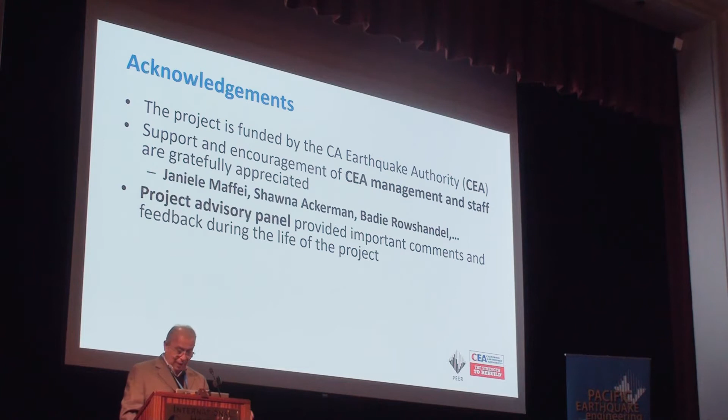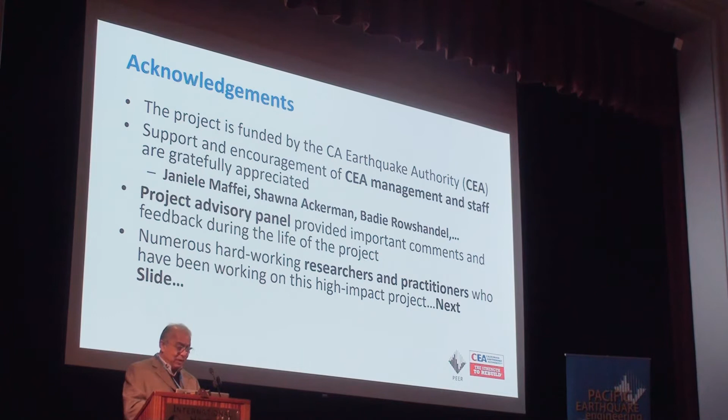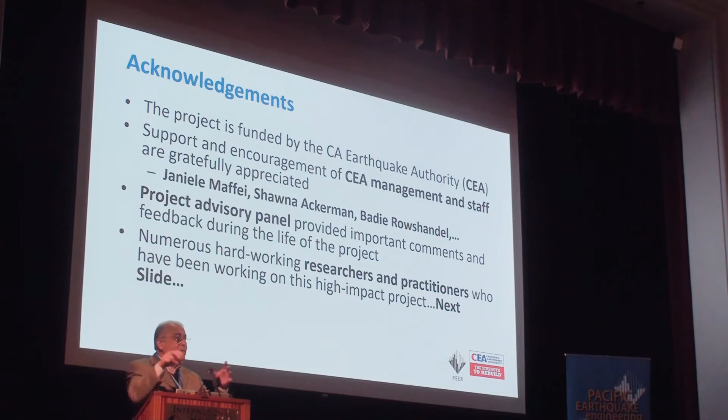Then there are two different review panels that I'm going to elaborate a little bit. One review panel on behalf of CEA, one review panel on behalf of the project, and we benefited from both panels. There are lots of people who work on this project. Numerous people. This is the strength of our community. Large projects, many people involved, students, postdoctoral fellows, researchers, practitioners, and at the end we stitch all the pieces together. It's really like a large puzzle, the pieces of the puzzle should go together at the end. So these are the people who are involved.

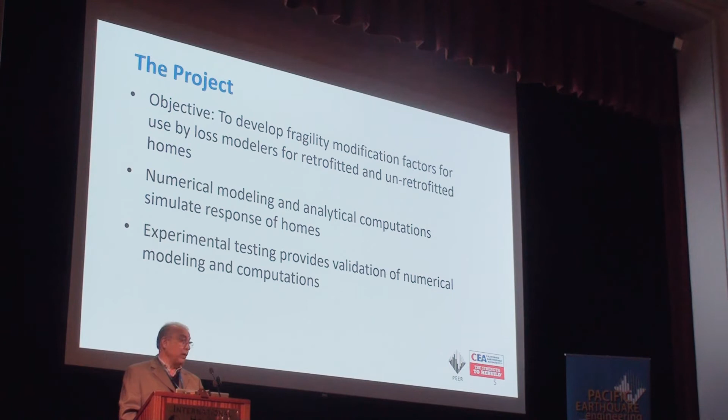There were other projects in our community, but for the first time, we did experimental work, lots of experimental work, which I'm going to elaborate, and lots of simulations. Obviously, with experiments you cannot do everything, and you need simulations. And the strength of our project, like any large project that we have been doing in the last 20 years, is the combination of academics as well as practitioners. This is not an abstract idea where you write a paper and win a Nobel Prize, which is a good thing to do, but this is not the thing. This is really applied research. We do something for a specific purpose.

We started October 17, 2016. We are going to finish it April 17, 2020, literally 2-3 months from now. We are not planning to get a no-cost extension.

After me, you are going to hear more on the details of the analytical work as well as fragility as well as the reporting. So experimental work. We did 2 different campuses of the University of California. At UC San Diego, they did numerous small-scale testing. Professor Tara Hutchinson and her PhD student, Brandon Schiller, they were working really hard to do all the experimental work at San Diego. At Berkeley, large component testing, and Khalid Mosalam and her postdoc, Vahid Mahdavifar, they were doing the experimental work.

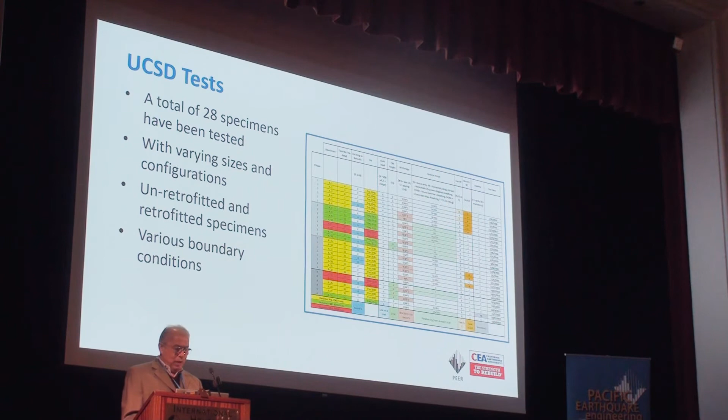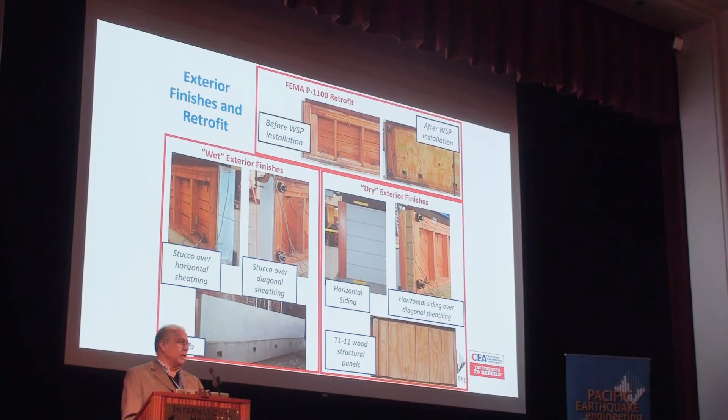At San Diego, overall, they did 28 specimen tests, very different size with different configuration, with different boundary conditions, which I'm not going to go over. There was a poster, I think, last night, and also last year, Kelly went through the details of that. Lots of variation. Stucco, non-stucco, different siding, different sheathing, and so on. They organized it and they are done.

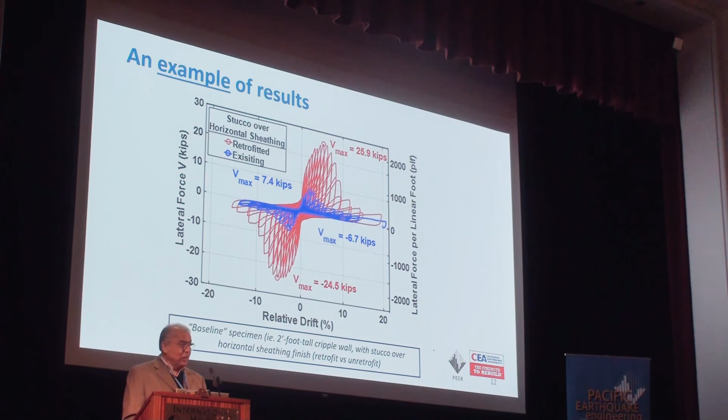So this is one example. There are hundreds of these things, hysteretic loops, that engineers love to see. So the blue is unretrofitted, existing, and the red retrofitted. And you see, it's unbelievably more strength and ductility of the retrofit specimen. So there are lots of things like that. There will be 2 reports from UC San Diego. They are drafted, and they will be published as PEER reports.

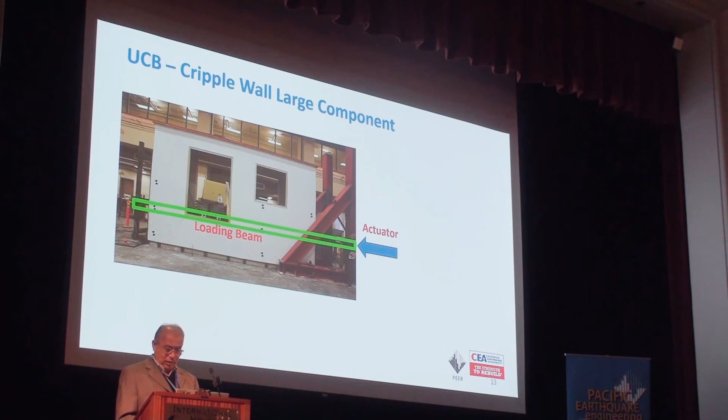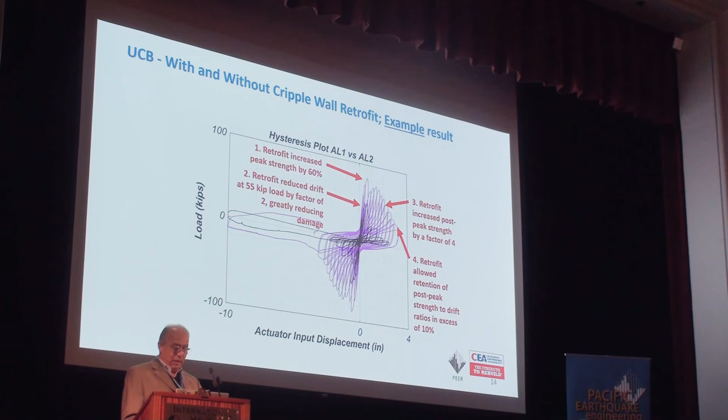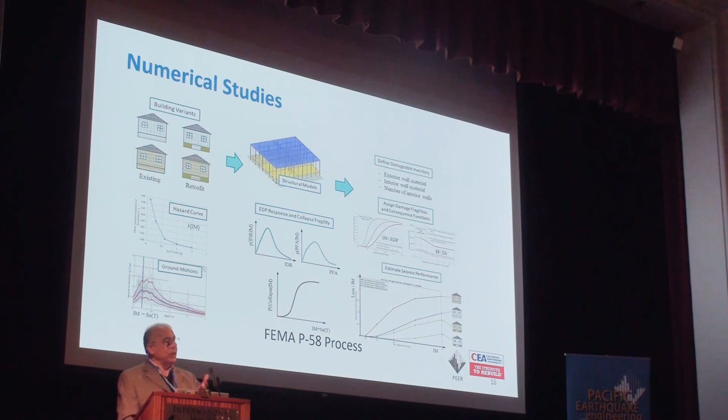Computer simulations: obviously, you do experimental work to do validation and to understand really some details that possibly simulation cannot capture, and then you rely on simulations. Simulations were carried out with the leadership of Greg Deierlein and very competent postdoctoral fellow Dave Welch, who is going to talk after me. They did unbelievably important and high-level simulations. So among various variations they did hundreds of ground motions, 40 ground motions at different return periods, and then they ran OpenSees, lots of analysis, and then they took it all the way to the fragility.

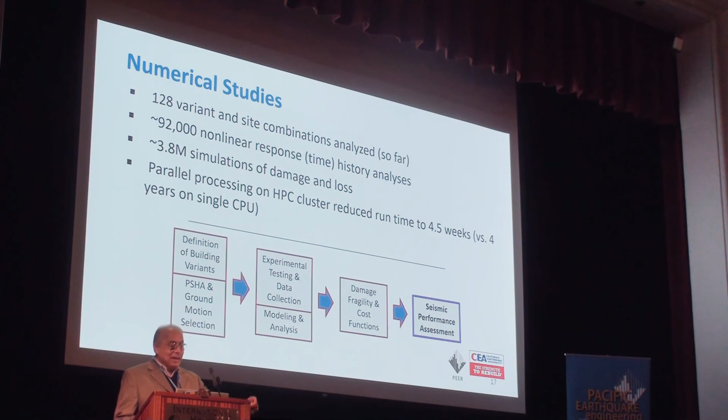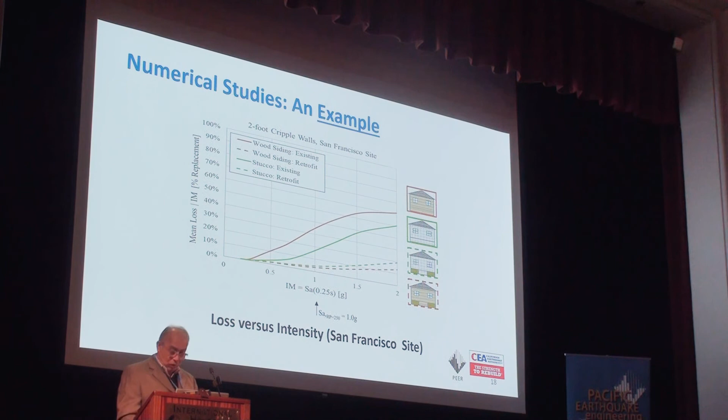So they sent me these things. Bottom line, 3.8 million runs they did. And then the various details, after me, Dave is going to talk about, and they took it all the way. So this is one example. The curves that you see, this is the loss versus the intensity measure. The top two loss curves are for existing. When you retrofit, obviously it drops drastically. So that is very good news.

Summary, the project is progressing very well. We are going to finish it on April 17, 2020. Multiple PEER reports will be published by that time. On top of all these, in the next few months, we are going to have two other reports. One summary technical report that is going to give reference to multiple PEER reports, and another very challenging but important so-called non-technical report, a report for non-researchers that Cheryl is going to talk about. That is very important for community. A website will be created at PEER with all the documentations, background data, and so on. We don't want to lose this after the project, and it will be communicated.

Now, I'm principal investigator of a project, 3.5 years, if you ask me to summarize it in 4 words, I was thinking last night, what should I say? I think the best thing is that retrofit is really effective. It works, experimental work, analytical work, it helps. I have a relative with a similar house in Concord right here, and I'm telling him, retrofit, it works, really it works. Appreciate that, thank you very much.